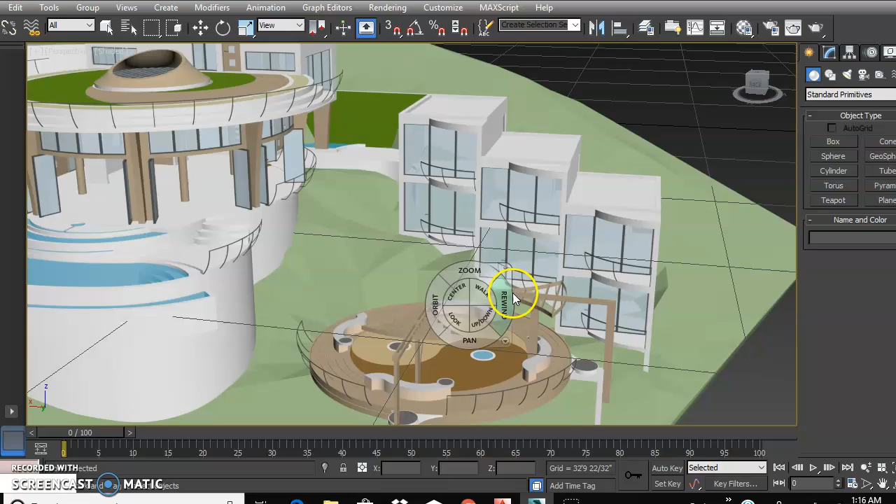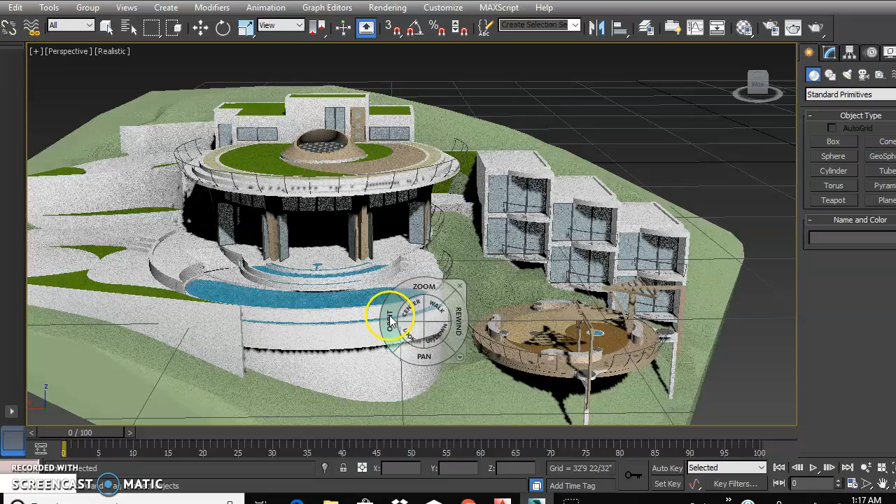So let's take a quick look at the model that we have here. I'll give you just a quick overall view, and then I'll explain some of the problems and things that still need to be resolved, and some of the things I've done. So I'm just giving you a quick overall view.

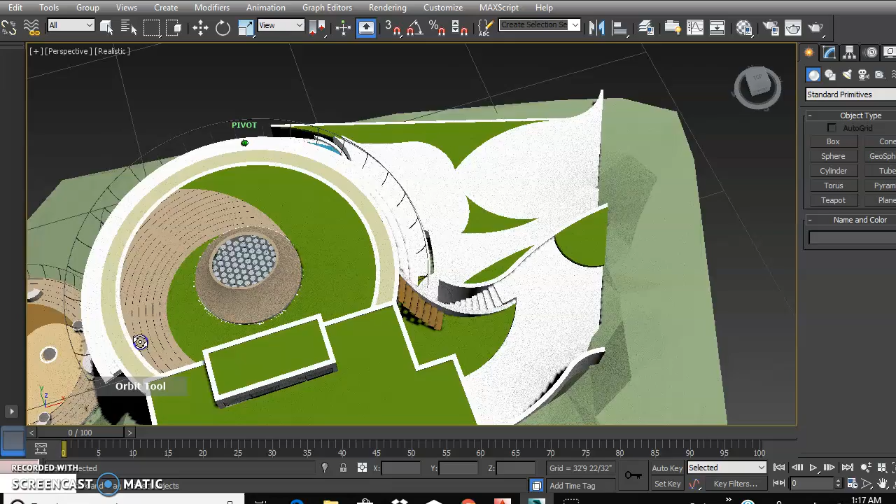Let's take our overhead shot. So this is basically the site plan as was drawn. Trying to line it up. Yeah, so overall view.

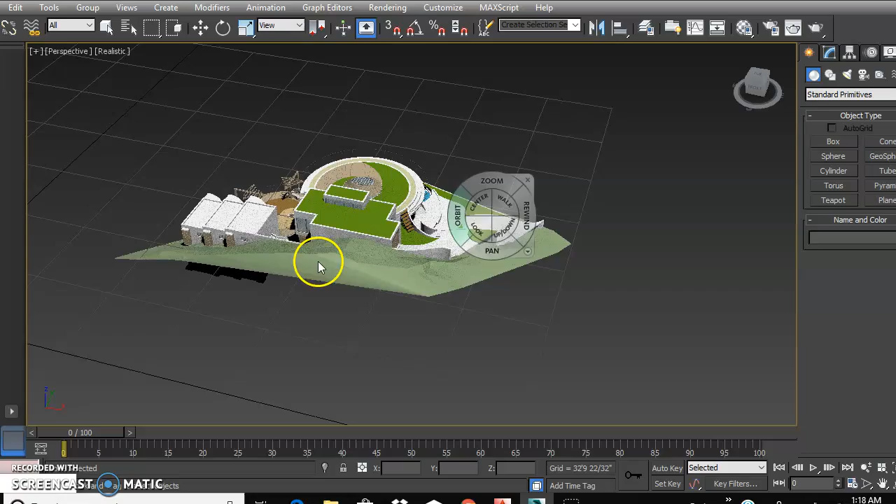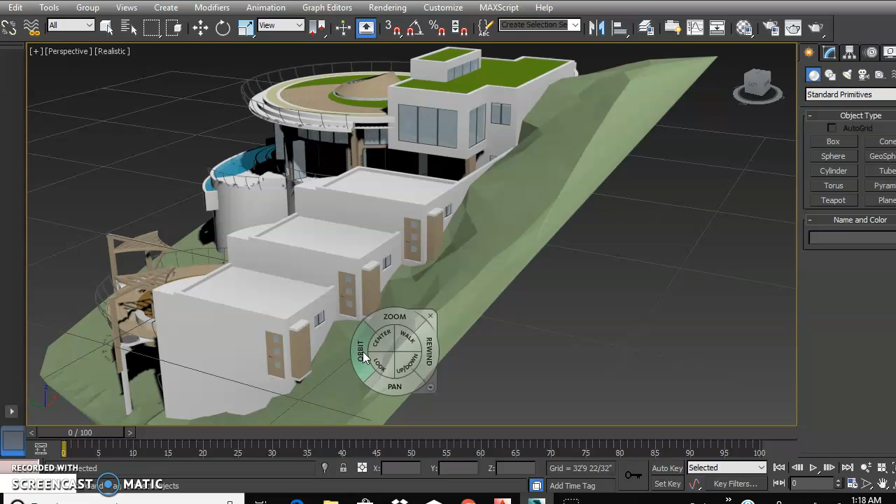This is the back side. Obviously, this is not a technically sound model, meaning there are a couple mistakes, a couple minor mistakes. As with working with the previous model and subtracting and adding volumes, sometimes the geometry isn't quite exact, but it's pretty precise in terms of measurement. It's just all the alterations tend to get some funny stuff.

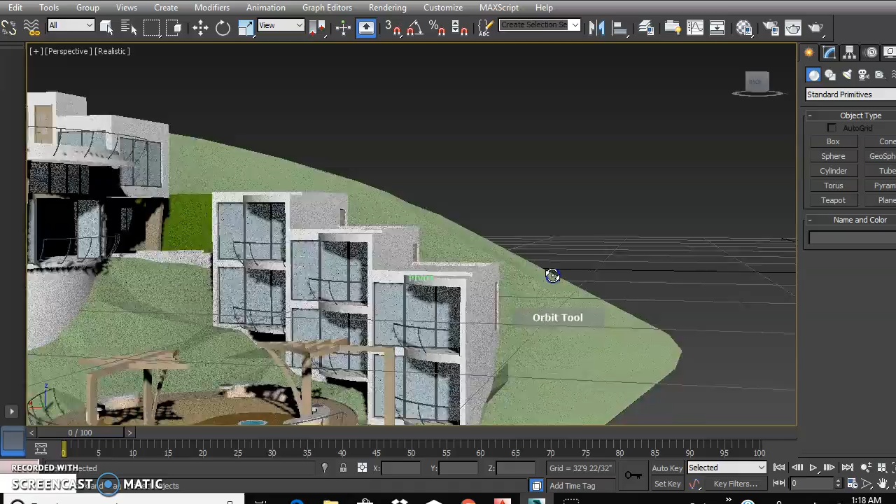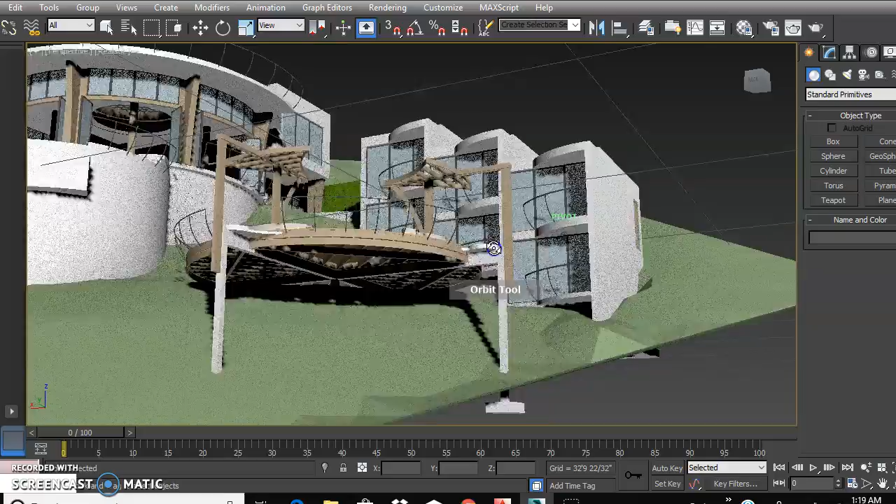I'll show you in a while. So it's not 100% accurate to just build with. But visually, if I needed to render it, I could just grab this and dress up the scene, put in plants and furniture and whatnot and render from this. So it's not a bad model. I'm just saying the level of accuracy is like 95%, 96%. It's not 100%, so just so we're clear on that.

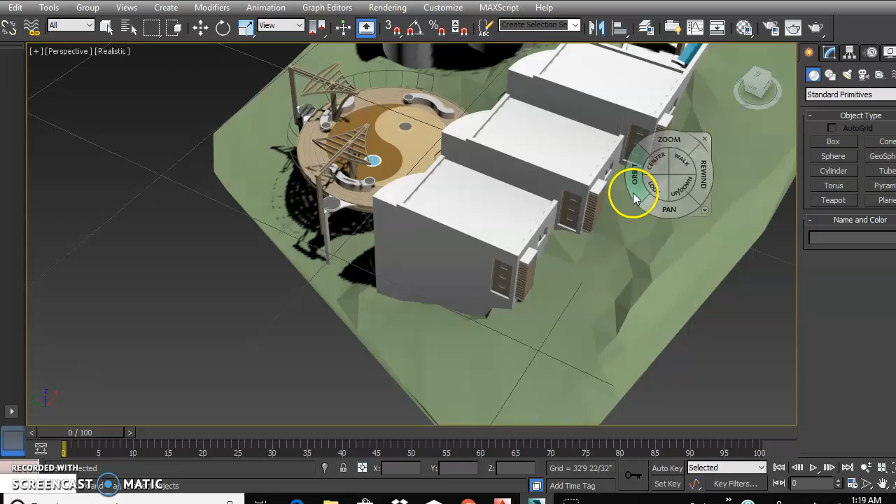Even things like the stairs to come up here, the walkway and all of that, that's not finished. So this is to get an idea of the back side of the cabins. I took out the trellis. I didn't think it looked good. Still looking at it, the cabins.

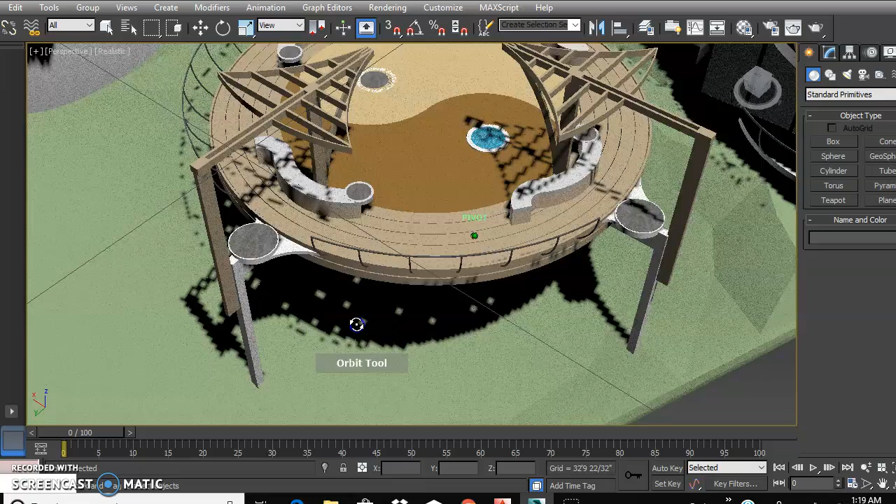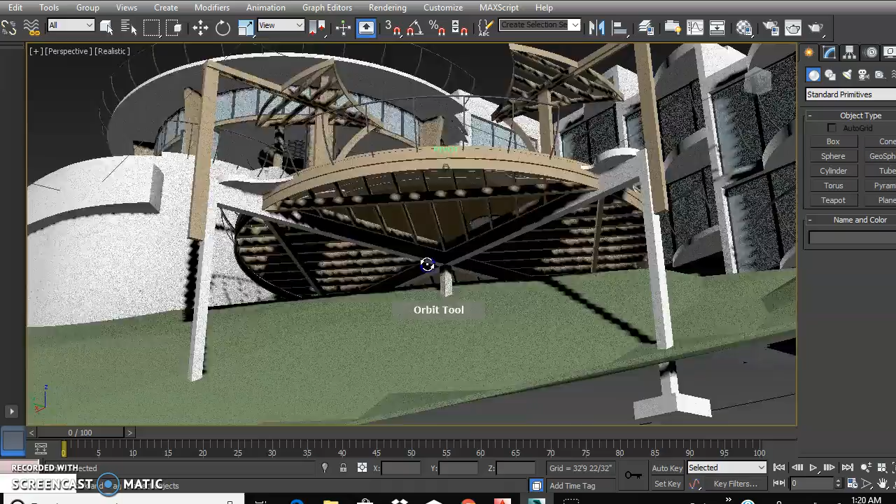Now to the deck. So I did four of these squiggly seating areas with the fire pit. So you see why I had to model this entire structure just to know it could work because the diameter of this deck is quite wide, so I need to ensure I could support it. So this is what's going on underneath it.

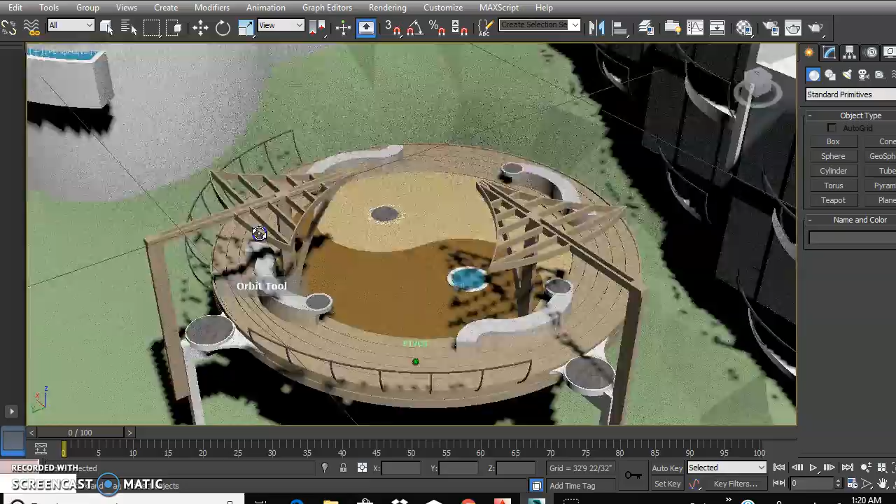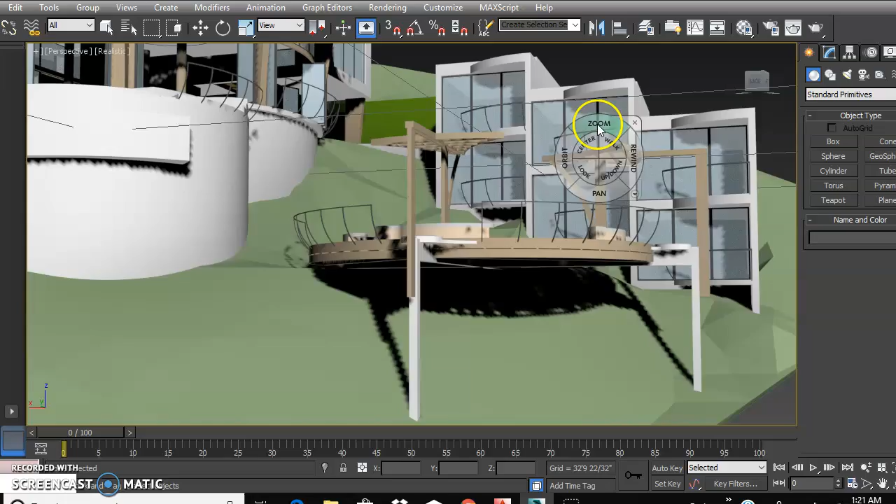But I kept this trellis. You said you liked it, so I'm mixed about it. It's okay, just the best I could come up with at the time. I like that the rails all integrate with each other, with the building, with the cabins, and with the deck. It all seems to be one language. I also like the circles, the semicircles, that they match this overhang here. So it all seems to be one architectural language, which is nice.

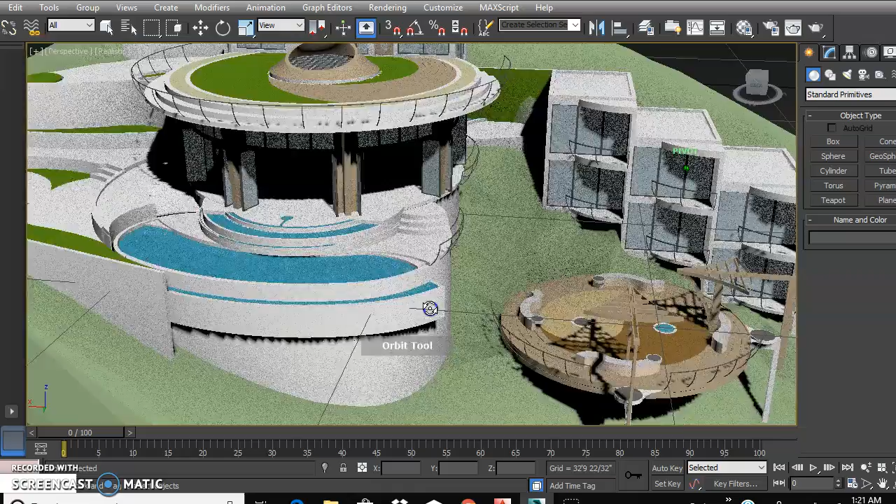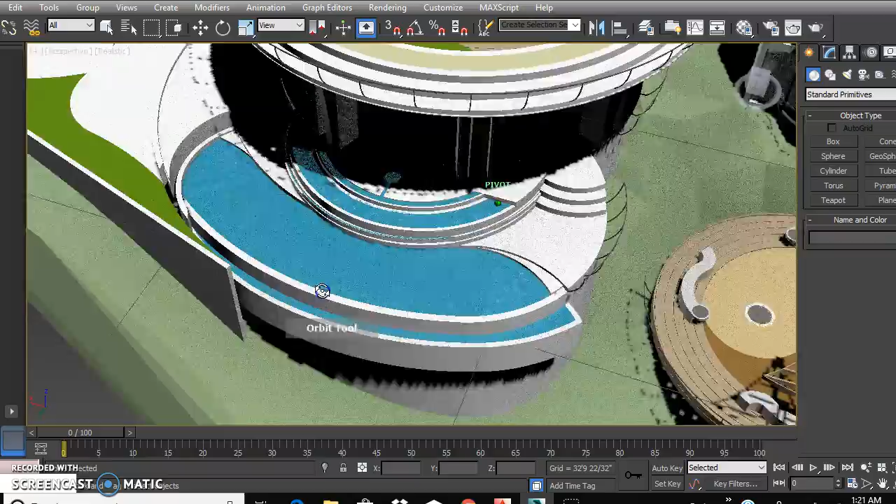This I had a lot of trouble modeling for some odd reason. Pretty much close to what it is, but it's not an accurate model. Didn't model it super accurate. For some reason it was confusing modeling it. So you have stairs here, you'd have your lounge chairs.

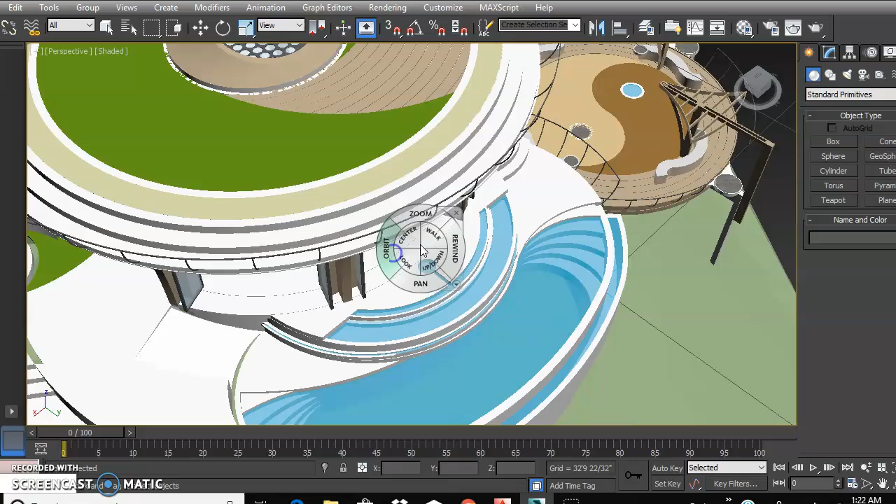Let's get rid of this shadow, taking away from it a bit. So let me just explain a couple things. So I lightened the rails, I made them very light, so it's not as chunky as before.

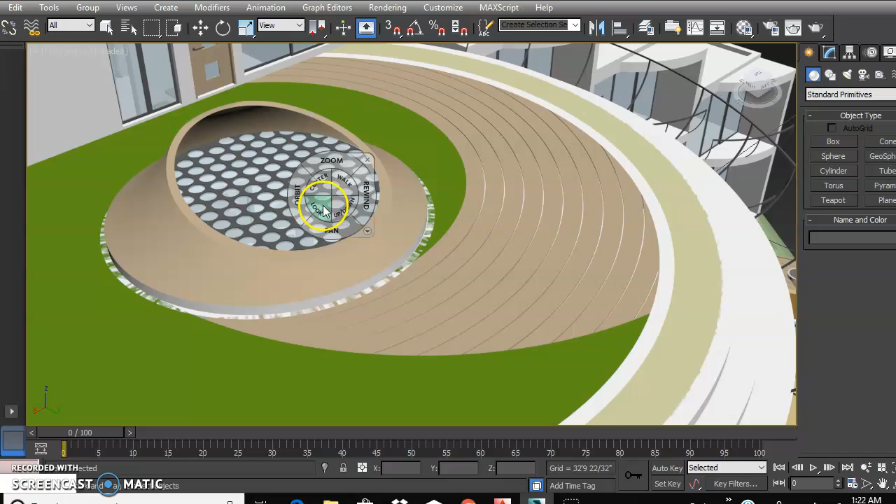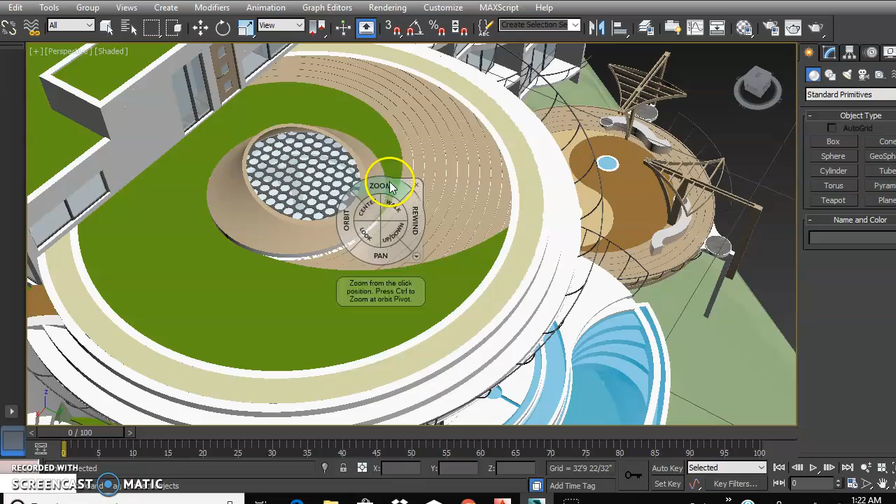This here is just my quick idea of how this translucent glass or plexiglass or whatever it be needs to be broken up, because you can't just have one large piece of glass here, so it needs to be broken up. Whether you do it rectilinear or whatever, but I thought seeing that this volume is circular, I could just use some circles. Maybe you do the circles more random. Who knows? From on top it looks a little crowded and busy, but I took a look

at it from inside, and it doesn't look too bad. It doesn't have too bad of an effect inside. I could imagine that when the lights come through, it'll look even better. I mean, this is just a thing on a computer, but in real life this should look pretty good.

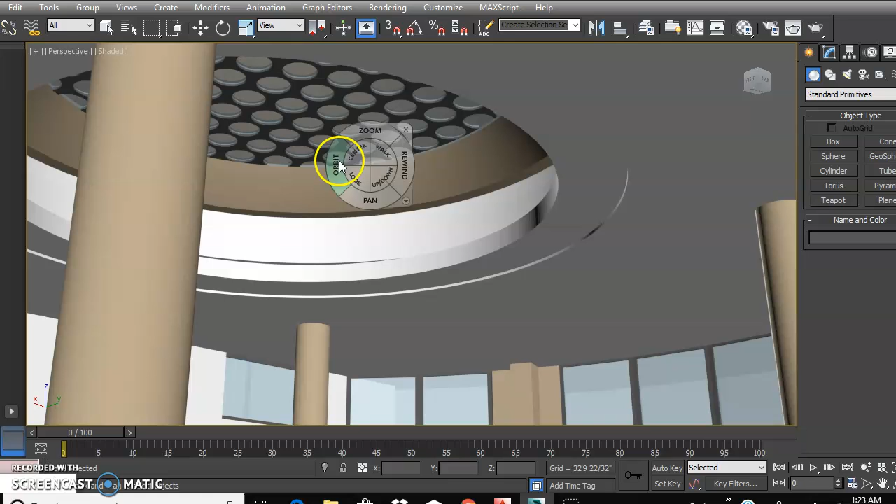This is a mistake, see what I'm talking about? Little mistakes. This will be the ledge. I added this ledge so that you could grow your plants and have your vines hanging down from this on the inside.

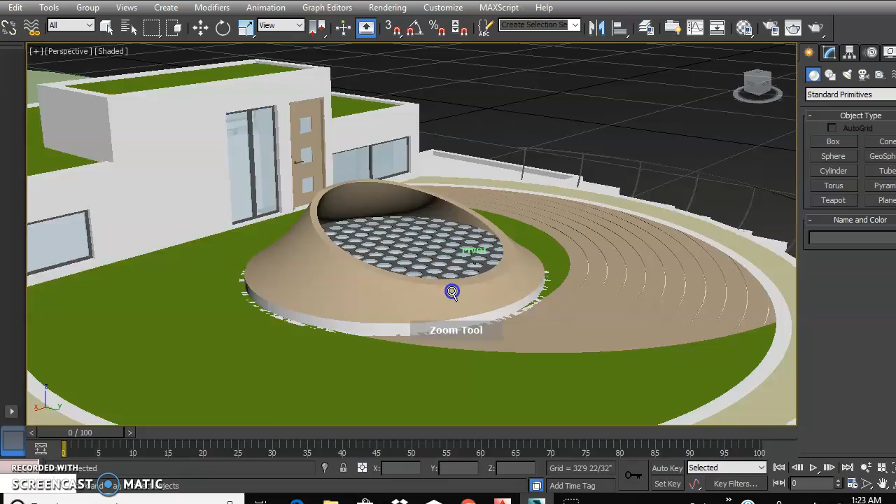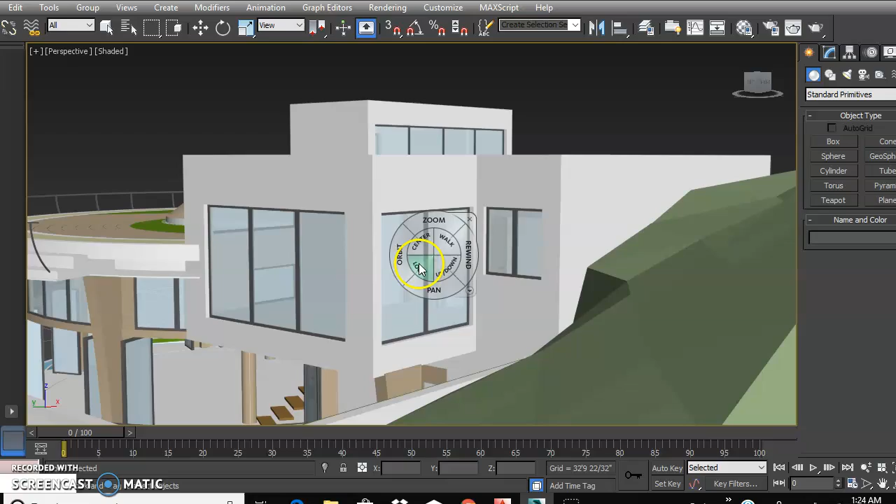I added your large glazing here, made these bigger, made this bigger. Oh yeah, in the back here, I think you wanted some more glass, so I really agree with that suggestion. Opening this up looks good on the outside, it looks better, it looks really nice. And obviously you could imagine on the inside it'd be quite illuminated.

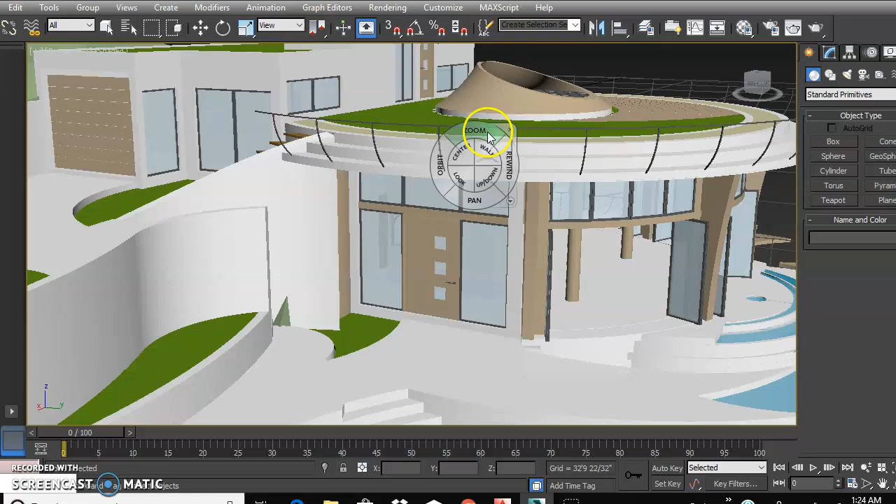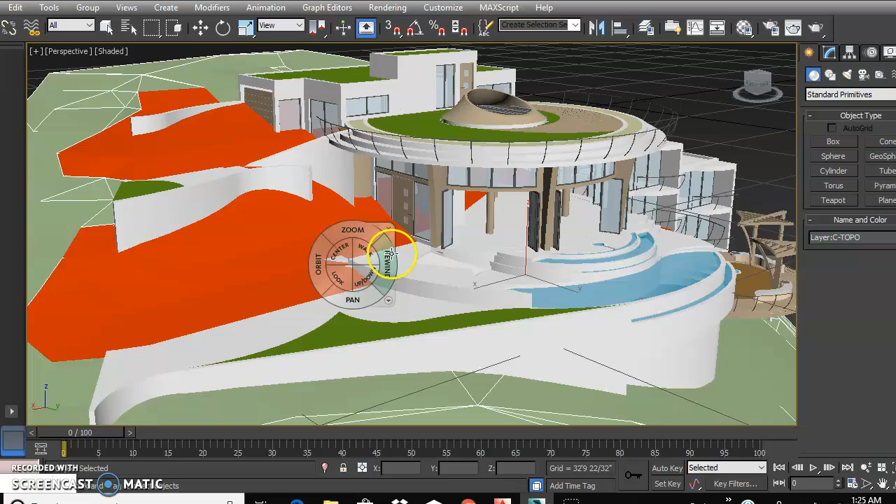So points meaning like I grab a point and then move it up and down to sort of mold the site to what I want, but it's not as exact. It's just to show something in a sense.

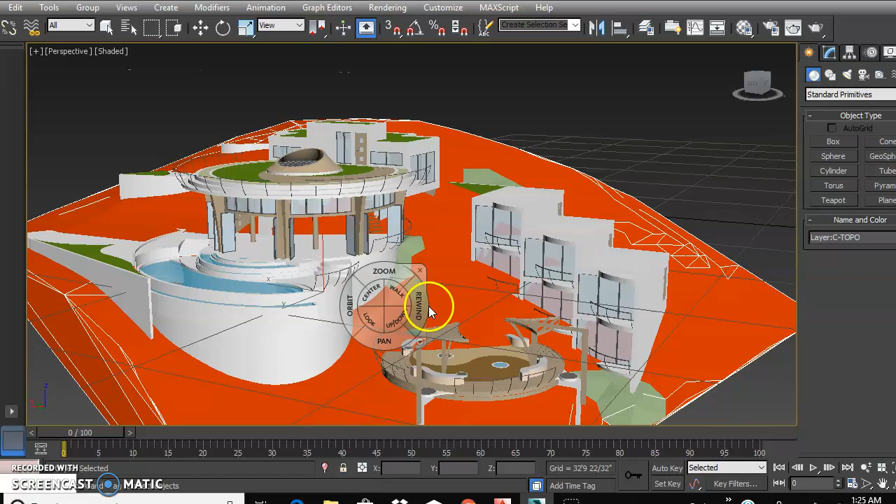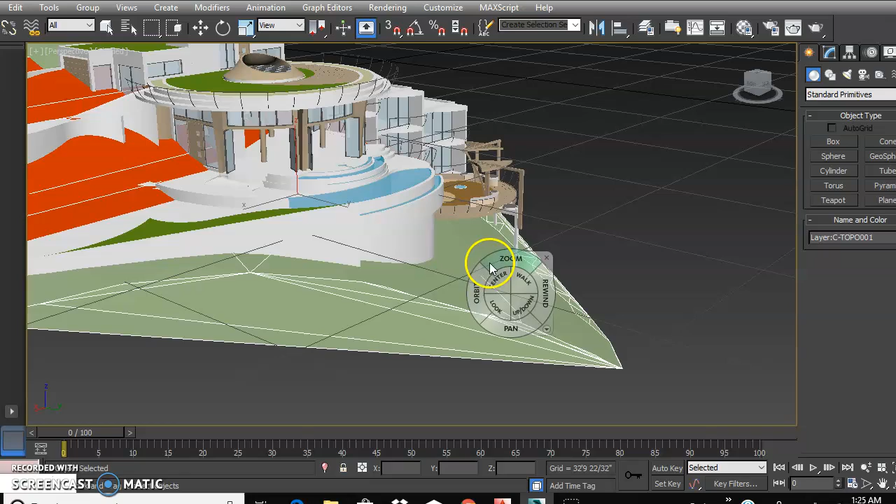So what happened here? The red is what is being excavated. From my anticipation, you'd have a lot of material cut away, some of which would be used for fill back in the building, but a lot of it would not be used. Maybe you could have it lower down here for landscaping. As you can see, the model is not entirely finished because here there would have a footpath to go all around. That has not been put in yet.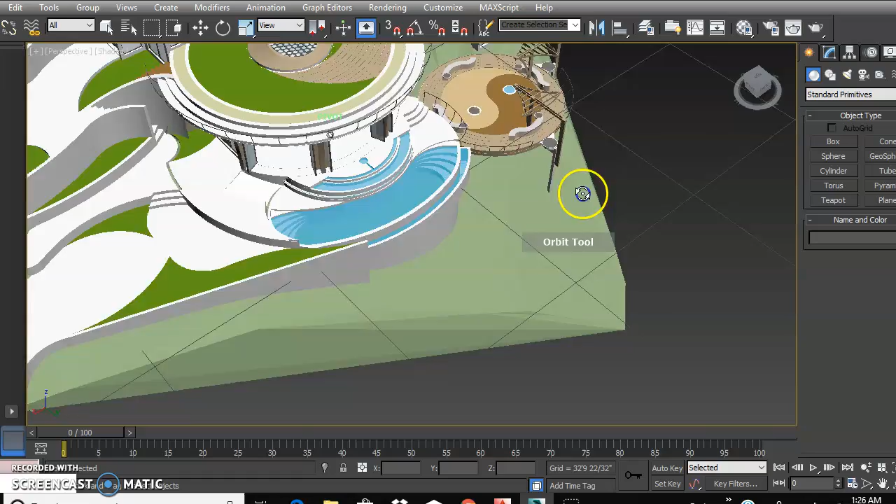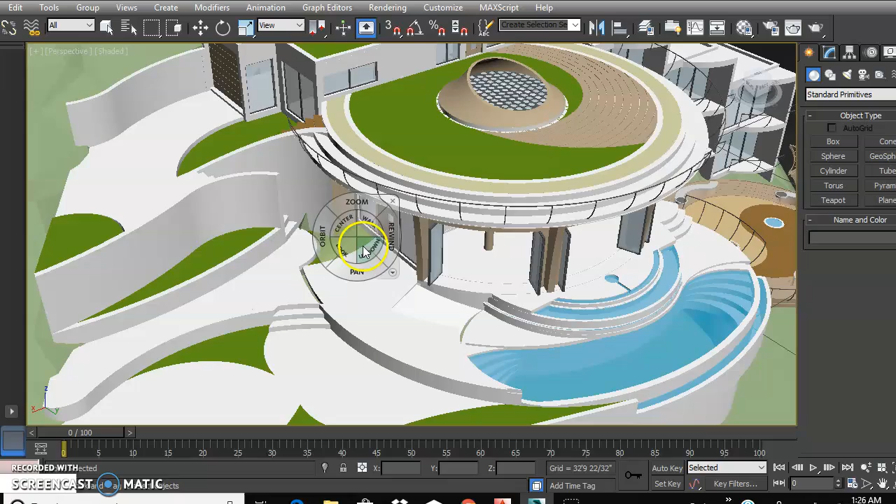So let me get to some of the problems. There are two things which I didn't see coming until I did the model. This space here needs some work. The intention originally was to have an area for gas and other utilities, like a little storage area, but not too intrusive on the entry. For some reason it looks a bit too heavy.

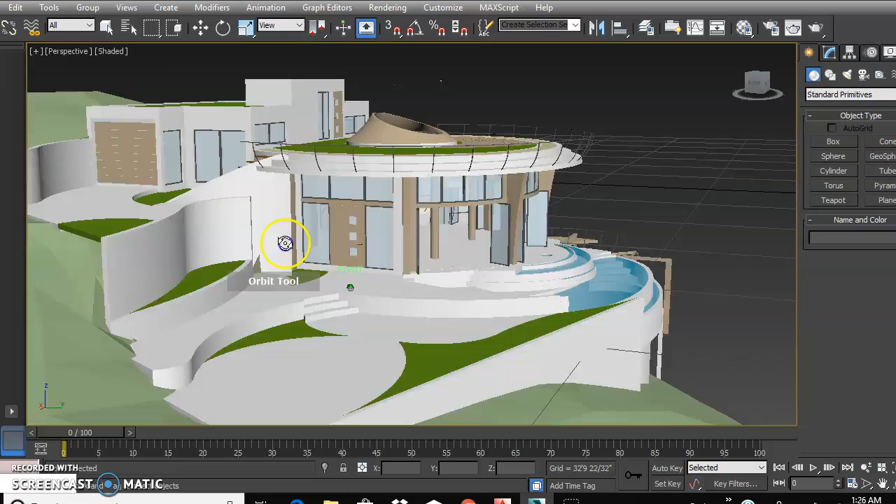I pulled down this wall to try and do something last minute with that, but it wasn't really working out. I remember we said we're gonna take out this wall, but you actually need either a wall or a rail there. So I sort of slanted it, but it still looks a bit heavy.

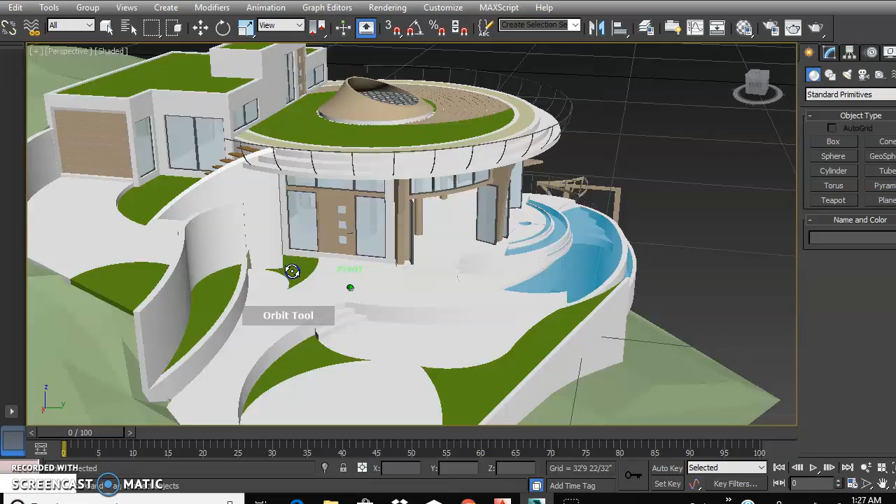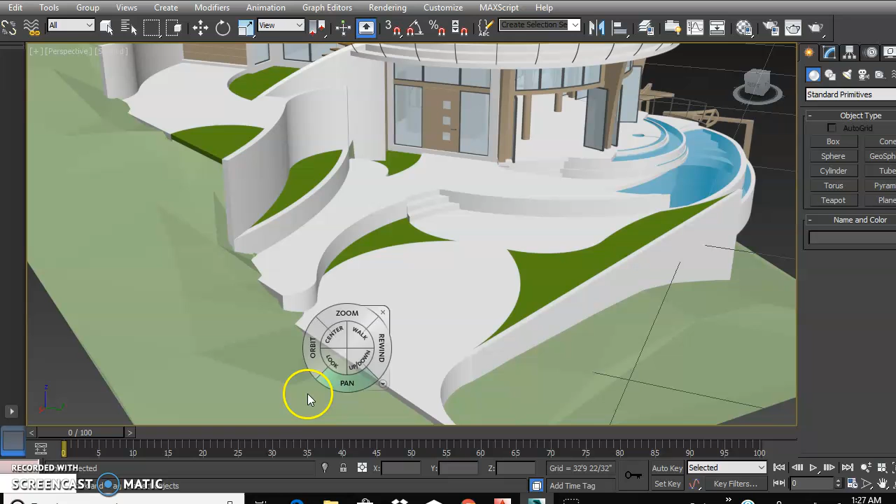The other thing I didn't account for—well, I sort of did, but I didn't think it'll be this bad—my initial impetus in setting these levels for the driveway, for the walkway, and for the guest parking was to have those line up on center with the road. So here it should be same level as the road, here it should be same level as the road, here it should be same level as the road.

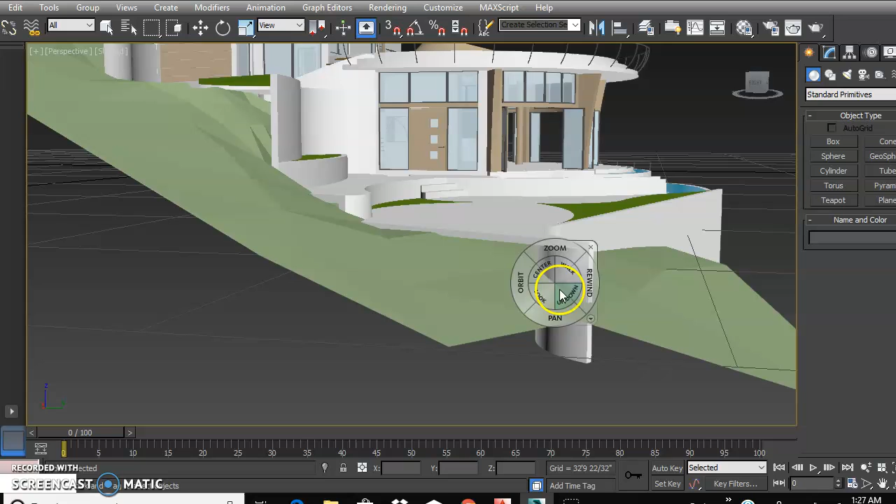They more or less work out that way. But obviously, as these are not slanted with the road and they're flat, you have these funny conditions where it gets this high, so obviously a vehicle can't climb up to that. So this might need to slope, and this might also need to slope with the road. They all would need to slope with the road to avoid these funny conditions here.

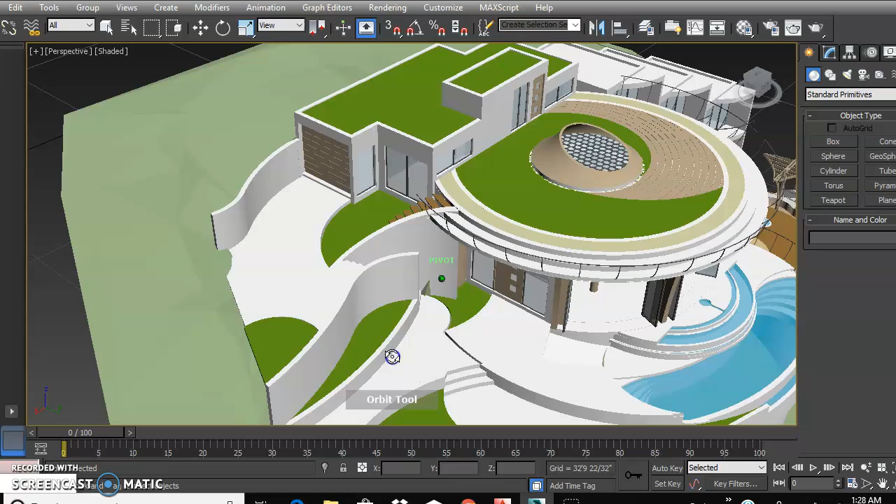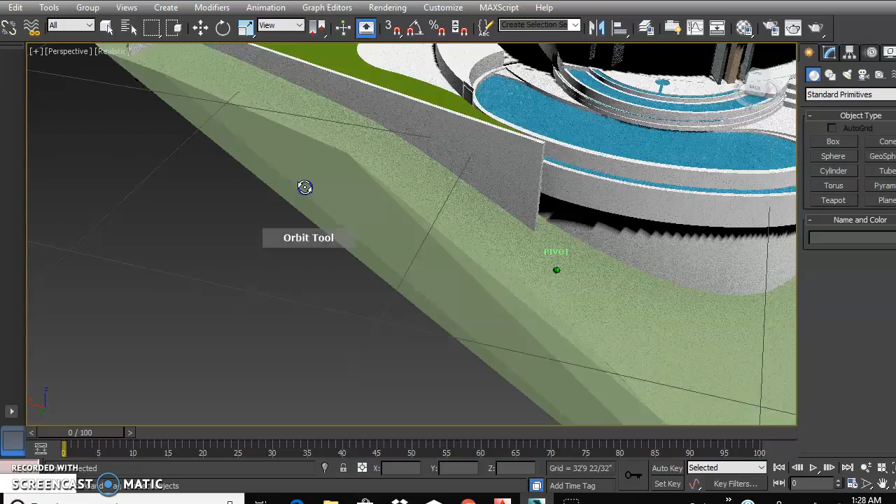So that's mainly the main issues I have with it. Aside from that, it more or less seems to work. Other little thing, this wall that I have here, I think it's getting too close to the pool. I don't like it, so that's something to adjust.

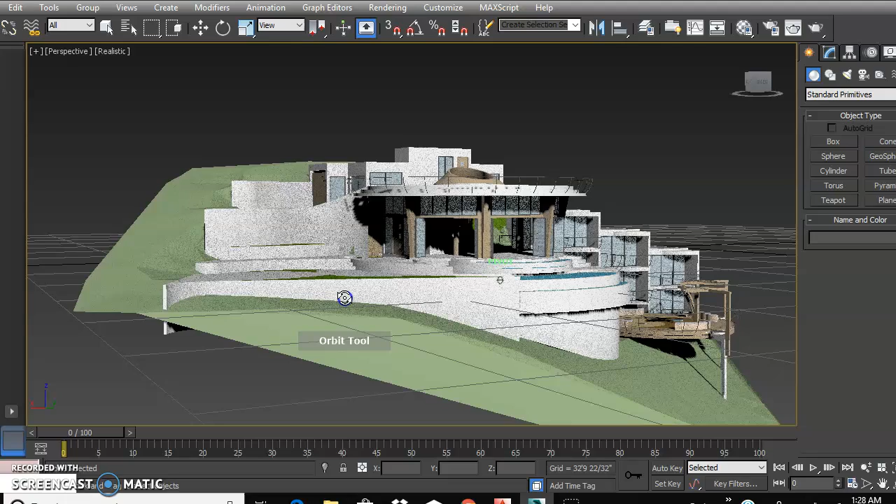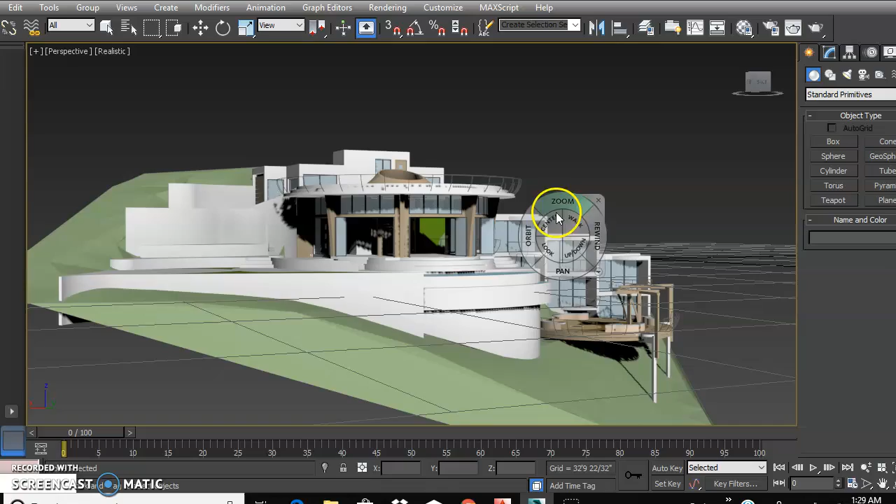All in all, the massing of it looks good to me. Take a look at this—imagine this is just a computer generated thing, not even rendered, but it looks pretty good to me when you consider how these step down. So it gives hierarchy to the main building, and there's a sequence. It's not just some random change in levels. There's a sequence to this which gives order.

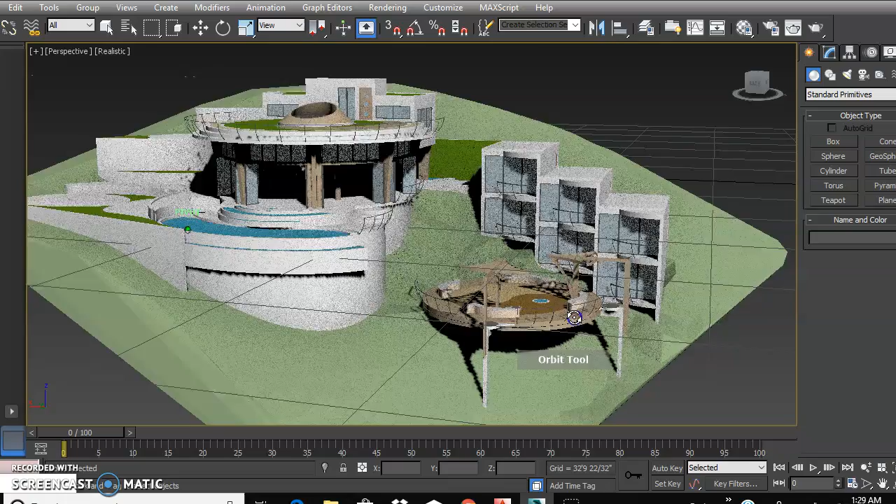There's symmetry in this, so this is balanced when you're looking at it from the front. So I think it's a very strong project. It needs a couple tweaks, but pretty strong project. In terms of cost, it's looking up there.

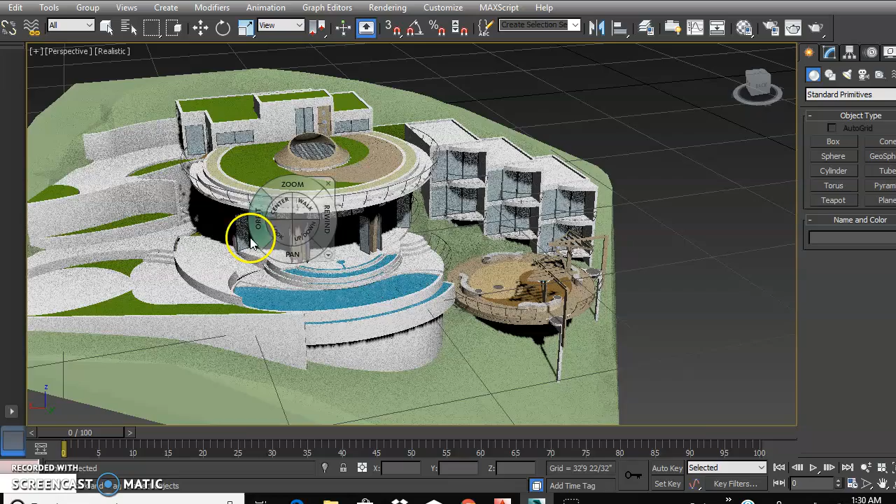It's looking like you might have to have some very smart cost saving measures, because when you consider, just looking at it, it's a lot of building infrastructure. Maybe some of this could be reduced a bit, but it kind of looks nice, at least from above.

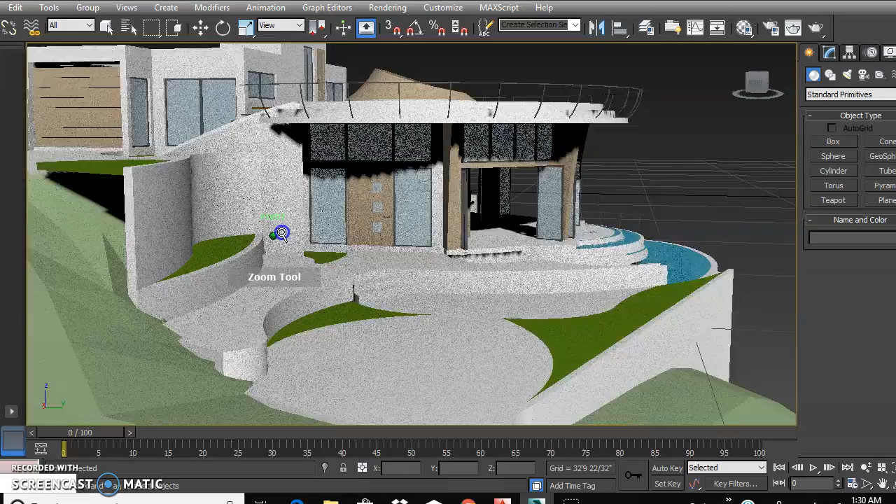Let me try and give you a sense of this wall. I remember you had said you would like to berm this. Maybe we might look at that instead, or maybe do this out of stone or something. So this is what you see when you enter in, and you just rotate around.

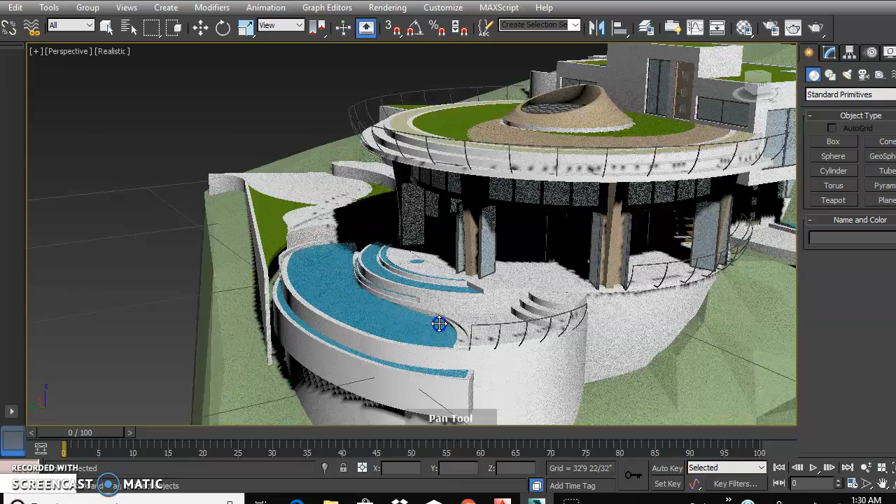Vanishing edge pool—obviously I'd have to put a pump room below here. I still haven't thought about where the cistern is going. I keep forgetting to think about that, but that's a small issue. It could go pretty much anywhere; just have to think about the most strategic area to put it.

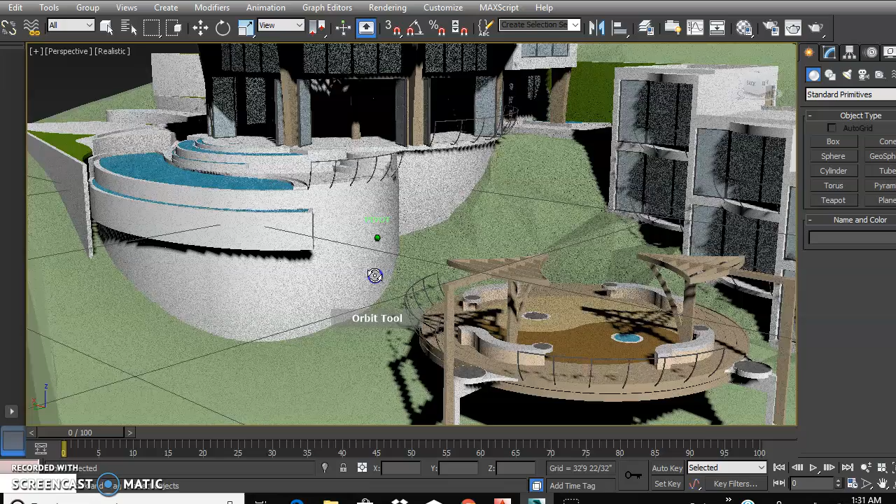So the pump room would be underneath here. Let's go to this master balcony—I was asking about that.

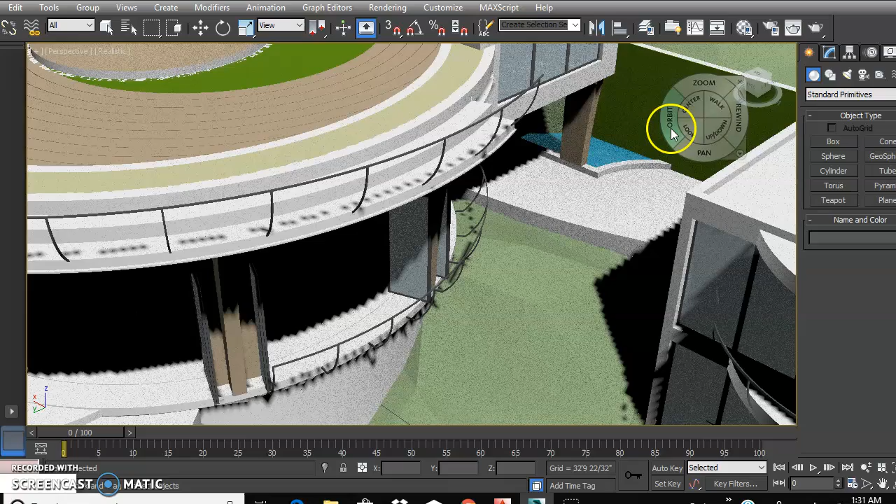So this is a reflection pond, green wall. Obviously, this just looks like one solid green. In reality, it'll have vines and whatnot. This is just a representation.

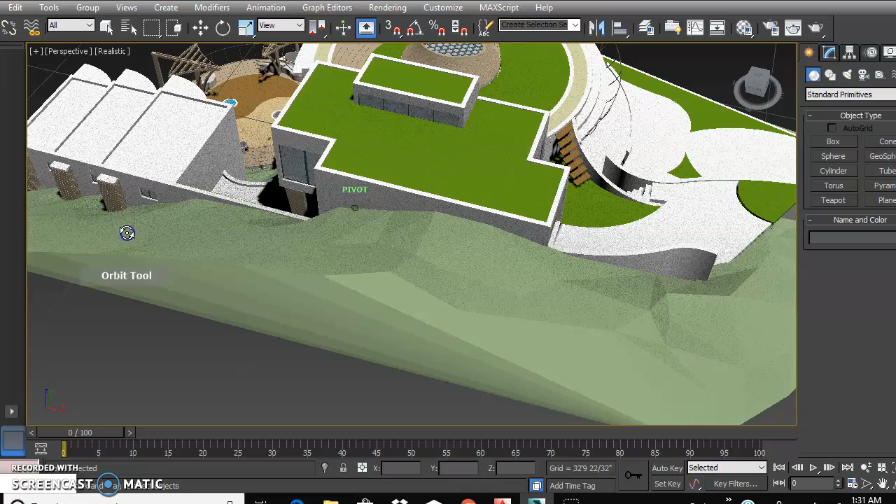So it's quite private, well, private to an extent. The living room kind of intersects with it a bit, but since it's your living room, it's private from the guests—they can't see anything. You're up in the air. The only thing is your view is sort of tunneled.